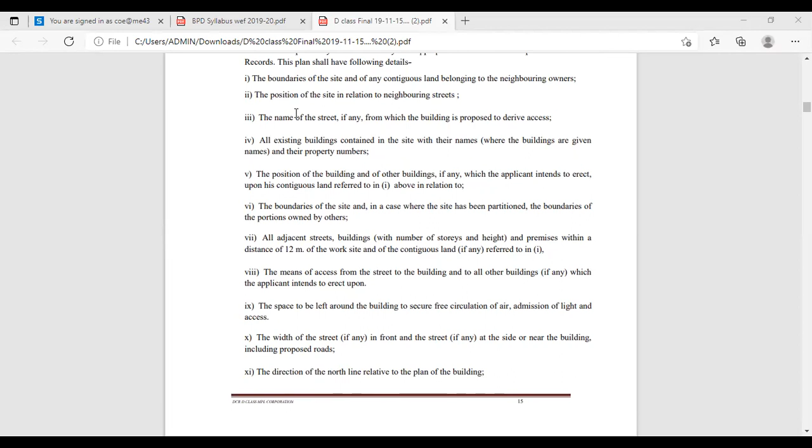Generally the site plan is drawn at 1:500 scale, and in that plan you have to mention various things such as boundaries of your plot, and the position of the site in relation to the neighboring street. Whatever road is there, from that road, where your site or plot is, you have to provide it.

Then, name of the street, whatever existing buildings are there in that particular plot, you also have to mention in the site plan, as well as the position of the building and other buildings, if any, which the applicant intends to erect upon his contiguous land, referred to above in relation to it, that also you have to mention.

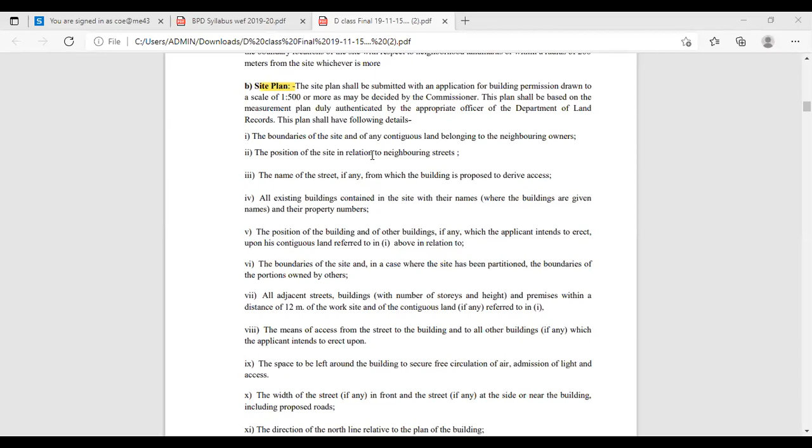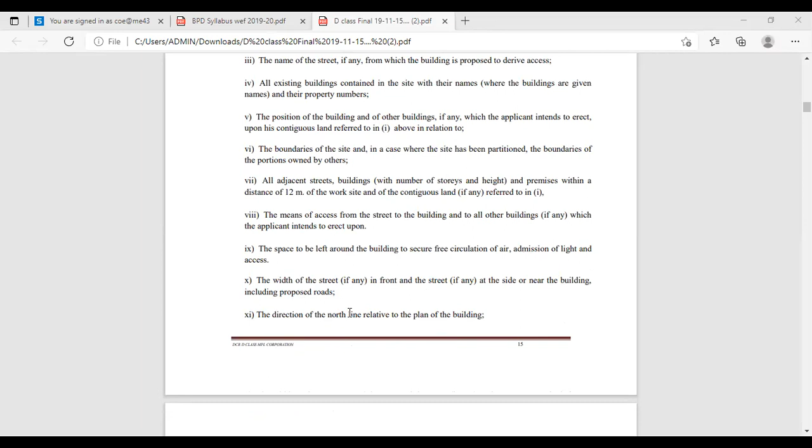Then you also have to mention whatever open spaces you have left, for getting free circulation of air, admission of light and access. Then also mention the width of the street, name of the street, and the direction of the north line relative to the plan of the building, that is nothing but the NTS, north to surrounding, you have to mention that in the site plan.

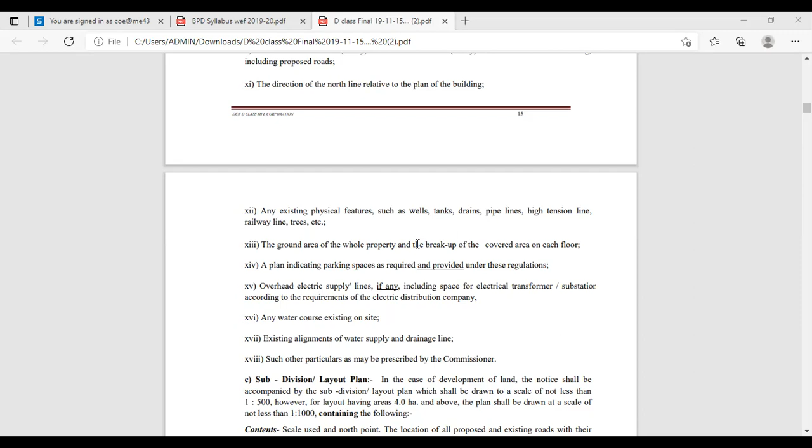Then also whatever existing features are there, such as wells, tanks, drains, pipelines, high tension lines, railway lines, trees, etc., whatever things are there on that particular site, you have to mention in the site plan. This applies not only for residential buildings but for other kinds of buildings also, you have to follow the same things.

Whatever necessary or required things are there, you have to take those things and mention them in the site plan. Then, if there is any existing water supply system or drainage line, its alignment you have to show in the site plan.

Okay, so by considering these things, you have to prepare the site plan. I think all of you understood how to draw the site plan and which things you have to mention in it. Okay, then after that, subdivision or layout plan.

Whenever you want to go for the NA, meaning whatever agricultural land is there, now you want to make it a non-agricultural land, that is nothing but NA. In that case, you have to prepare the subdivision or layout plan, and it is also drawn at 1:500.

It depends upon the area of the plot. If it is less than 4 hectares, then you have to prepare the subdivision plan or layout plan at 1:500. And if it is more than 4 hectares, then you have to go for 1:1000 also.

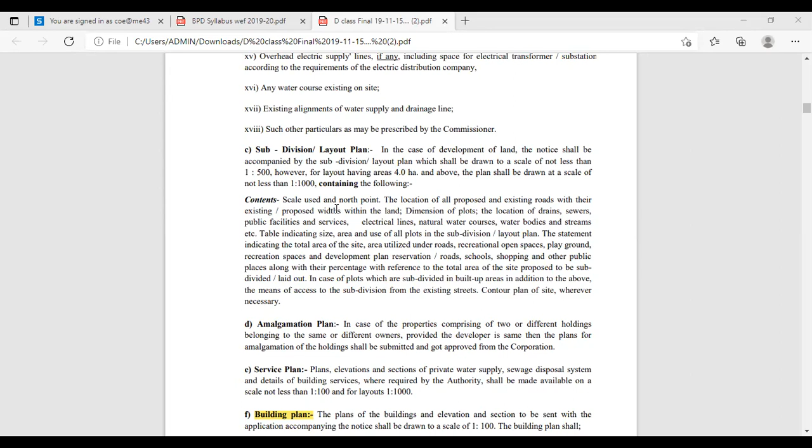Okay, then amalgamation plan. Here, amalgamation is nothing but ekatrikaran.

In case of properties comprising two or different holdings belonging to the same or different owners, provided the developer is the same, then the plans for amalgamation of the holdings shall be submitted and got approved from the corporation.

Is there any requirement for amalgamation? Suppose one owner is there and two properties are on his name, then in that case, if he wants to develop both properties, and both properties are near to each other or side by side, then amalgamation is required.

Then for that amalgamation, you have to take prior permission from the commissioner of the corporation or whatever local authority is there. From them you have to take the permission. Okay, then after that, service plan.

In that plan, elevation and section of private water supply, sewage disposal system, and details of building services where required by the authority shall be made available on a scale not less than 1:100, and for layout, 1:1000.

Means whatever service plans are there, maybe electrification plan, sewer plan, or furniture plan, those things you have to submit. You have to draw it separately using the scale 1:100, or sometimes we can go for 1:50 also in case of residential buildings. If the plot size is small, then we can go for 1:50 also, because we have to show the things in detail.

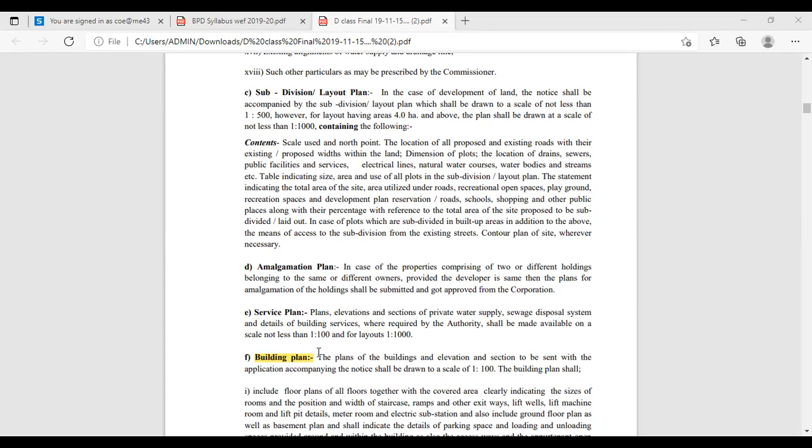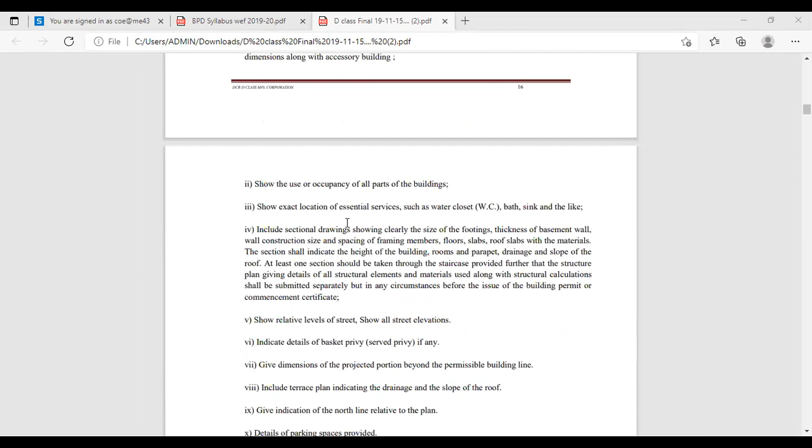That's why we are increasing the scale. After that, along with that building plan, whatever I told you should be mentioned, including the various things according to the planning - the different units there.

In that drawing room or living room, then bedroom, WC bath, kitchen, dining room, study room, storeroom, puja room - whatever number of units are there, those units you have to mention in that building. Whatever plan you are going to prepare, that is nothing but the building plan, and you have to mention the things I told you earlier.

According to that, you have to provide the detailed sketch plan, elevation, section, then key plan, site plan, and details of openings - door window schedule - then area statement, pro forma 1, and title block. These things should be there in a building plan.

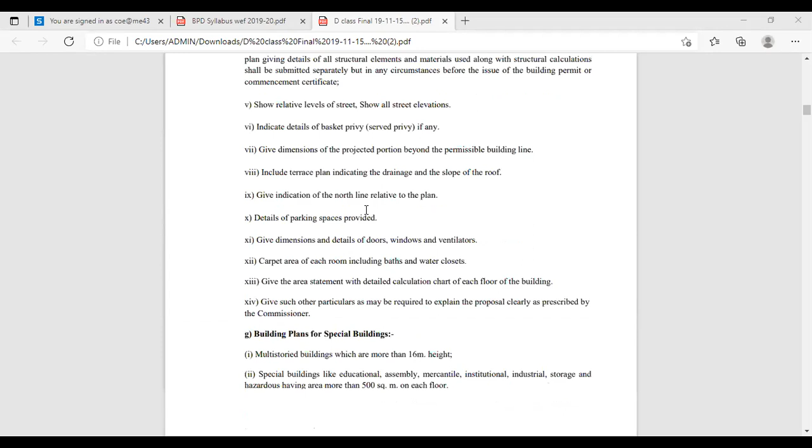Considering these things, you have to submit the application to the concerned authority, and you will get the approval for the building permission as well as a commencement certificate. I think all of you understood about this.

After doing the application for getting the permission or approval of the plan and commencement of the work, after verification of the plan and getting satisfaction from the concerned authority or its team, they will provide us the commencement certificate, and whatever plan is there, they will get approved.

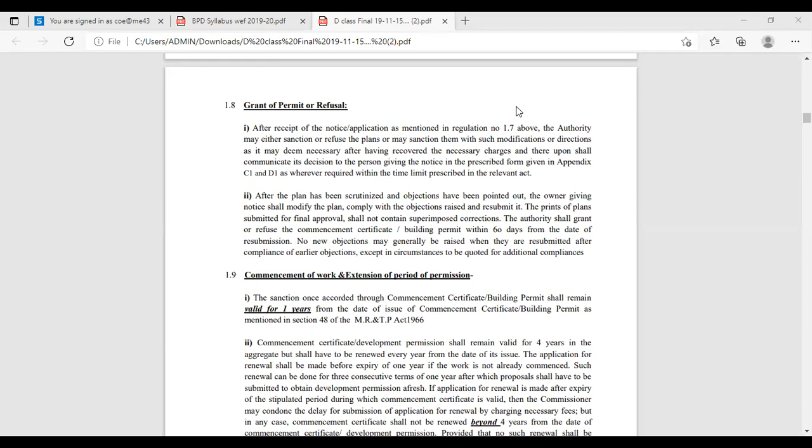So whatever commencement certificate is there, that commencement certificate is generally valid for 4 years. But we have to renew that commencement certificate every year before the end of the year, so we have to take due care about that.

Whatever validity is there of the commencement certificate or building permission, it remains valid for 4 years, but you have to renew it every year. After 4 years, that validity of the commencement work or building permission will get cancelled.

Then once again you have to follow the same procedure and obtain the commencement certificate. After getting the commencement certificate, you can go for the actual construction at the site.

You can go for line out, then excavation, and after excavation, foundation - construction of the foundation bed, foundation, then plinth beam and column up to the plinth level.